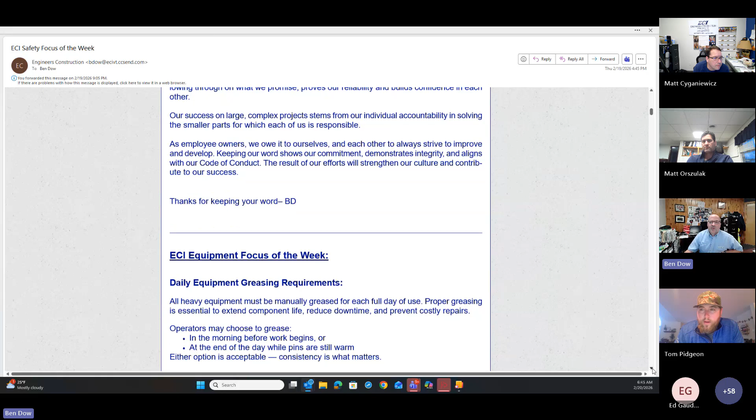This is going to strengthen our culture and contribute to our success as a company. It's going to allow us to do big, complicated projects because we'll be able to trust each other, and it's going to make us happier when we can trust each other. So I'll go back to what I started with: don't be a liar. Don't lie.

Intentionally or unintentionally. So any of the mechanics, Brad or anybody, if you want to chime in on this one.

Equipment focus of the week is greasing the equipment. It's got to be manually greased at least once a day, and proper greasing extends the life of the stuff. It's a way that we can take care of it, make it last a lot longer, and avoid a lot of costly repairs.

So operators, sometimes they grease in the morning. I used to have a guy who always greased in the afternoon, after the pins were warm, because he thought it was easier to grease. So it's up to the operator, but there are some things we need to grease at the end of the day anyway.

As you see in the special notes, if you have a wrist, this guy Del Gilly ran one of the 595 rubber tire excavators, and he'd pump a couple shots of grease in there at coffee break and at lunchtime. He'd hit that wrist - he had a Wainwright twister wrist on that 595. Larry Raymond told me one time, and I think Pat Wells can attest to this, that the machine assigned to Gilly lasted so long and was so tight on that wrist because he greased it like 2-3 times a day.

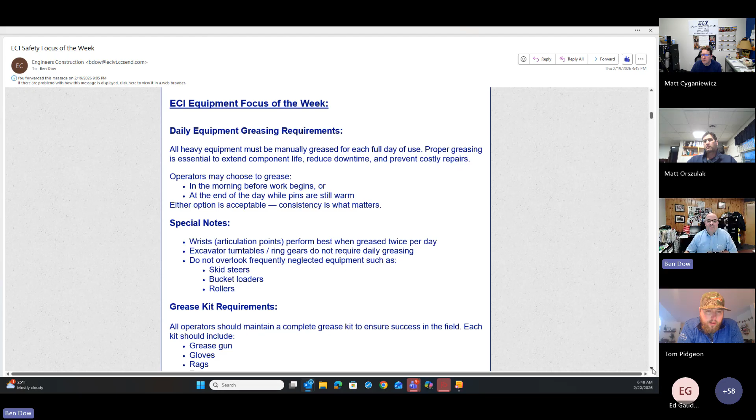Those slip seat items - when we're slip seating in skid steers, loaders, and rollers - sometimes you've got to be the one that says, man, that doesn't look like it has any grease. Let's grease it.

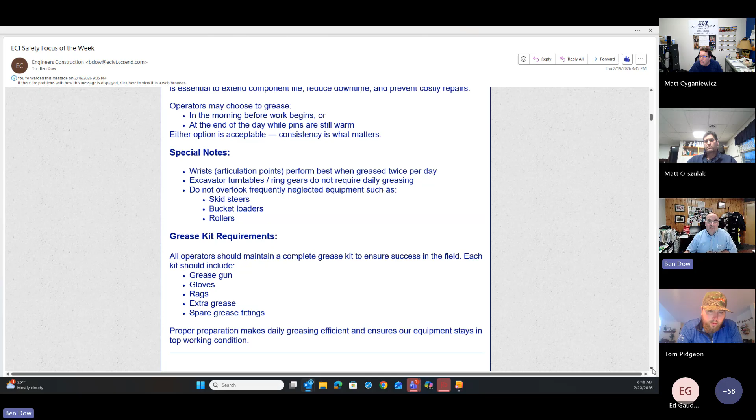I had a good grease kit, and the operators - we should all have some items. We all need a grease gun, of course, and it's good to have gloves, rags, extra grease, but also spare grease fittings. I remember Gilly had a little tackle box we gave him with different fittings and a couple of special sockets to get some of the fittings, because sometimes those things get plugged or damaged and we've got to replace them.

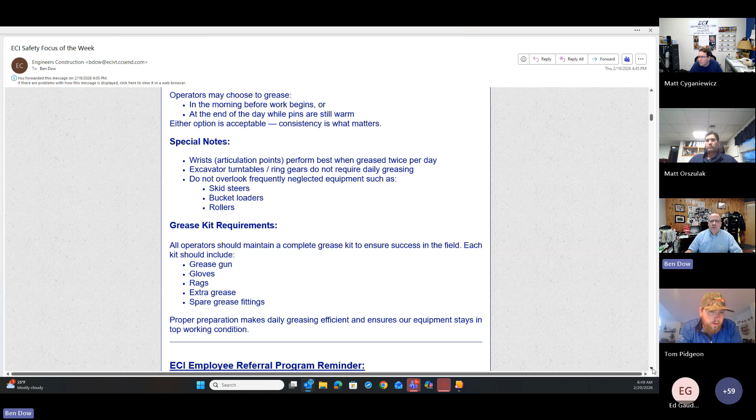We also had - I remember Larry had a thing he'd hit with a hammer that would actually open up a plugged grease fitting, and I'm sure the mechanics know how to do that. So greasing the equipment is really important. Any of you guys out there, mechanics or anyone, have any comments on greasing equipment? I probably can't stress it enough.

I would just say, don't hesitate to call. If you got something that won't take lube, call us. Any questions at all, call. If it's squeaking, squealing, won't take grease, we need to know. We'll help you out. We're here.

Anybody, all of you, call. You guys would rather have a call to help grease than to get called every time something breaks, right? Or show up when there's 2 inches of play in the joint. It hasn't been greased in forever. Let us know.

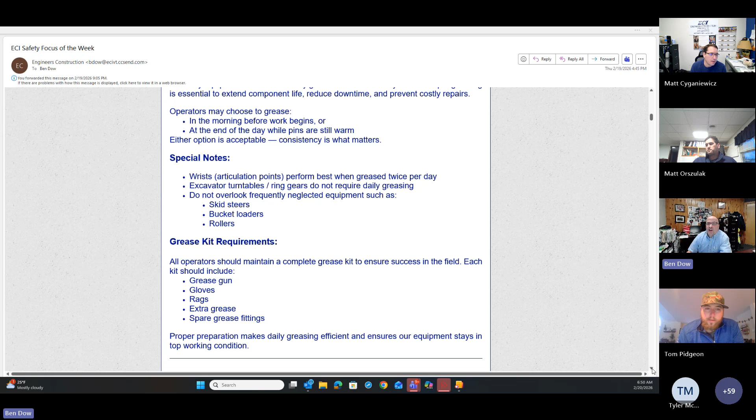And I think it's really important. I can say this stuff, and sometimes we say this stuff, but when one of our guys on the staff says this stuff, they mean it, and they care about our stuff just as much as and more than we do. It's like these are like their kids.

These pieces of equipment, they really care about them. Be sure that you're inspecting everything as you go too, especially our bucket connections. We haven't had a bucket fall off in quite a while, so let's keep that up. Oh yeah, definitely.

Perfect. So take care of our stuff. And remember that whenever you bring something back in the shop, I always say this, clean the crap out of it, because those guys have to clean stuff out of the cabs to get to their work. And it makes them feel a lot better when something comes in and it's at least clean of debris and trash.

All right, I wanted to remind you all, thank you for taking care of our stuff. I wanted to remind everyone of the employee referral program, because some people probably don't remember that we do have this program. I think we get our best employees from our employees, because I think all of you are a good judge, and you're not going to recommend somebody that's not a good fit to ECI. And we've been very successful.

And remember, if someone recruits you, you can read this, but after someone's here for 4 weeks, if you're noted as recruiting someone on their application, after 4 weeks you get $250. And then if they make it 6 months, that's a pretty good chance that we're hopefully doing our job and we're keeping the right people. You're gonna get another $750. So that's $1,000 per recruit.

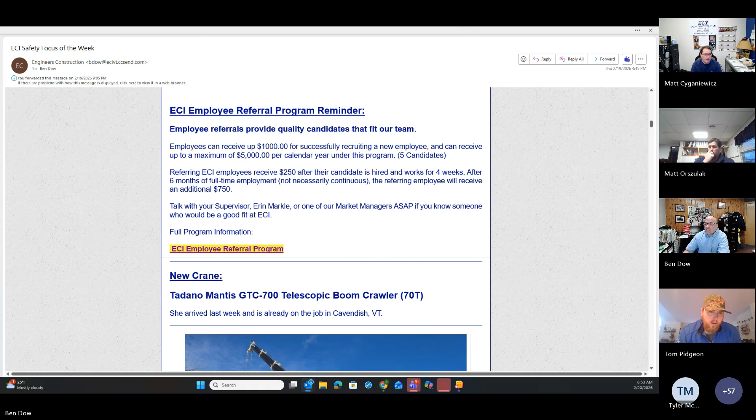So if you click on this, you can see that we do have the complete program listed out. I put that on there so that you guys could all read all the finer details of the referral program. It was revised this January 1st of this year. So it's an ongoing program. And we're paying them out every couple weeks. I sign the little notes that go home to you. So I know that we've got a lot flowing out, which is good. So if you don't know about it, now you do.

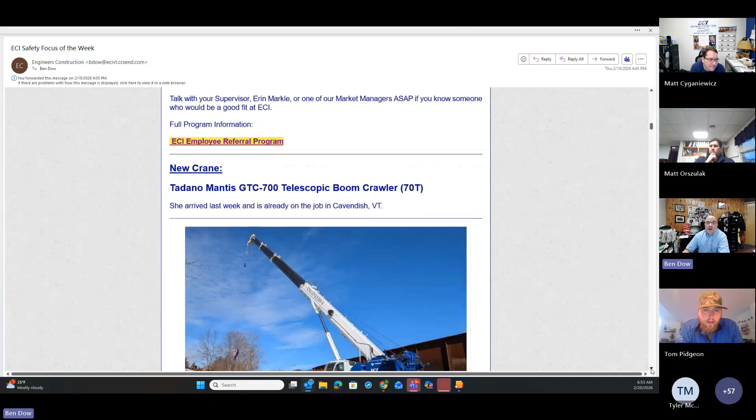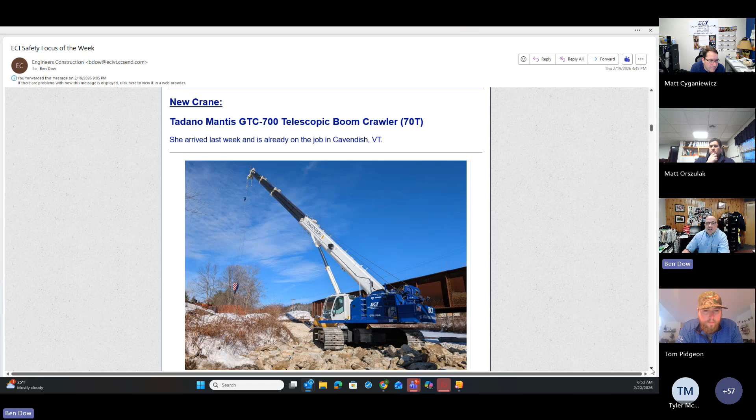We got a new crane. You probably saw it in the yard. The guys got it here last week, and they received training. I noticed that there's not a name on the door. I know we got some guys competing, but we've got a few guys that run it, several guys that run it. But this is a Tadano Mantis GTC 700.

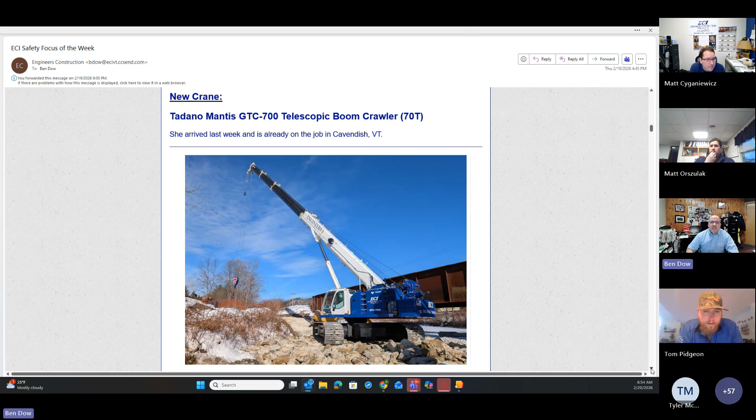It's a telescopic boom crawler, 70 ton. It's got a lot of boom. It can crawl with a load. It's going to replace the 750. The 750's got a lot of hours on it, and you're going to see that cleaned up, and we're going to hopefully get a good price for that to help contribute to this purchase. But I think we should all be proud of this.

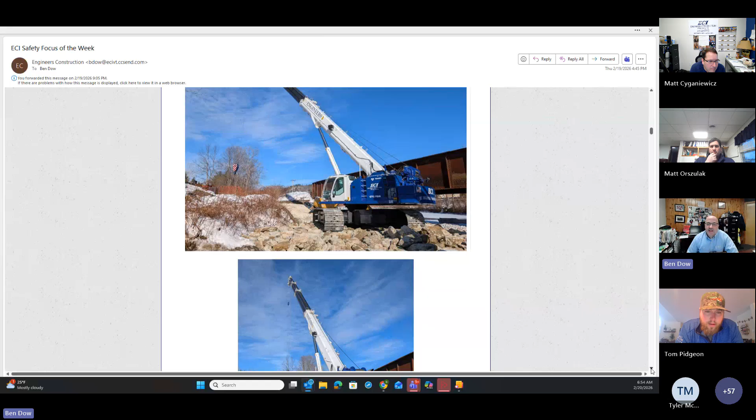I already got an email from one of the guys in Albany that does similar work and gets our newsletter, and he was all excited about our crane last night. But that's down in Cavendish right now.

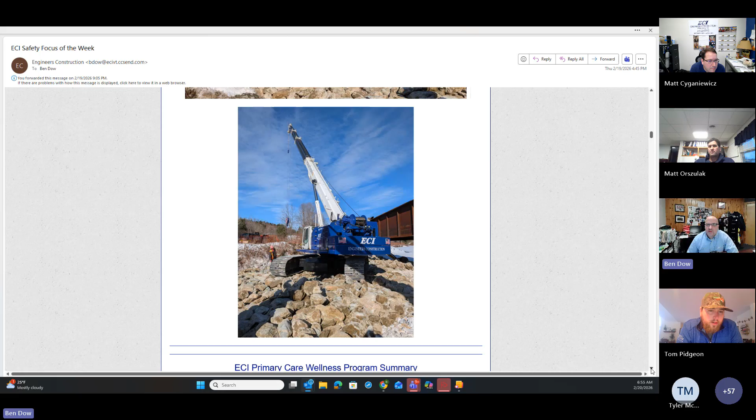She started with basically 0 hours. So we're proud of it, and we're going to continue to feature some of our new stuff, because I think all of you work together and identify these machines and these things that we need to replace, and everyone's gonna see that we're gonna be getting new machines in as we need them in all the groups. So it makes us a little jealous sometimes when we see a new piece and we didn't get it, but rest assured, we're all gonna have that experience.

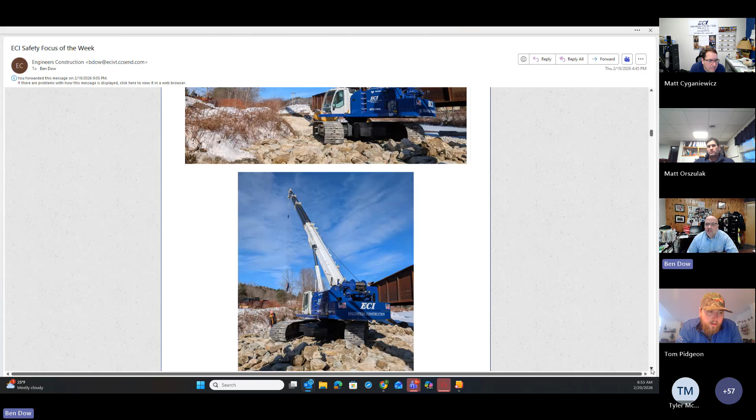And I know there's a lot of new trucks out there, so be happy about those new pickup trucks and things that we've got in the last year. So I'm excited about that crane. I didn't put all the specs in there. I figured you guys can Google it and get all the good info.

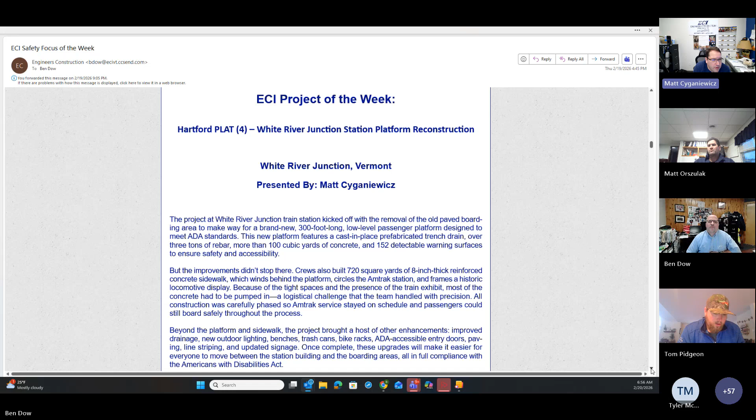The project at White River Junction train station kicked off with the removal of the old paved boarding area to make way for a new 300-foot-long, low-level passenger platform designed to meet ADA standards. The new platform featured cast-in-place prefabricated trench drain, over 3 tons of rebar, more than 100 cubic yards of concrete, and 152 detectable warning surfaces to ensure safety and accessibility.

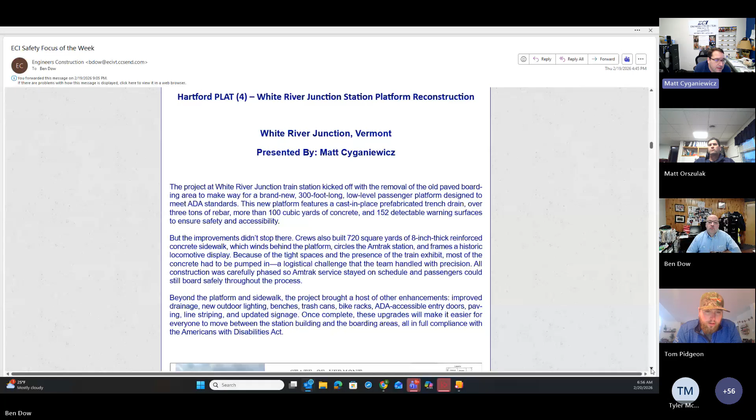But the improvements didn't stop there. Crews also built 720 square yards of 8-inch thick reinforced concrete sidewalk, which winds behind the platform, circles around the Amtrak station, and frames a historical locomotive train display located right near the station itself.

Because of the high, tight spaces and the presence of the train exhibit, most of the concrete had to be pumped in, a logistical challenge that the team handled with precision. All construction was carefully phased so that Amtrak services stayed on schedule and passengers could still board safely throughout the process, which was very important.

We got to do the work, but also keep the passengers boarding and the train moving, no delay to the train. And it was a challenge for all of us to keep everything going.

Beyond the platform and sidewalk, the project brought a host of other enhancements to improve drainage, new outdoor lighting, benches, trash cans, bike racks, ADA accessible doors for the entry to the building, paving, line striping, and upgraded Amtrak signage, which, believe it or not, was a very challenging thing too, because Amtrak has a very particular way they want things done—heights, sizes, lettering, all that good stuff.

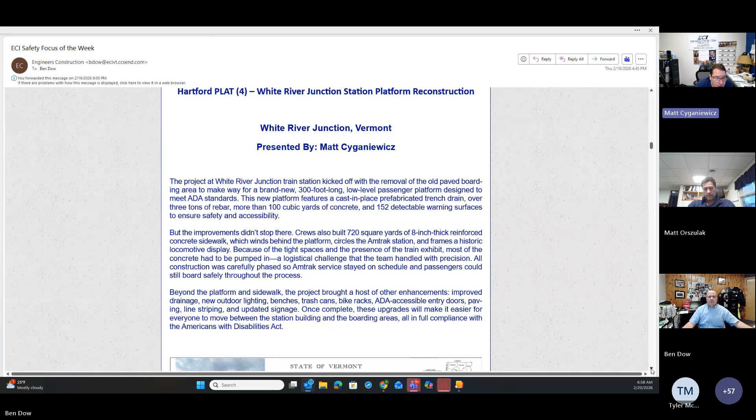Once completed, these upgrades will make it easier for everyone to move between the station building and the boarding areas, all in full compliance with the Americans with Disabilities Act, which was the main focus of the upgrade.

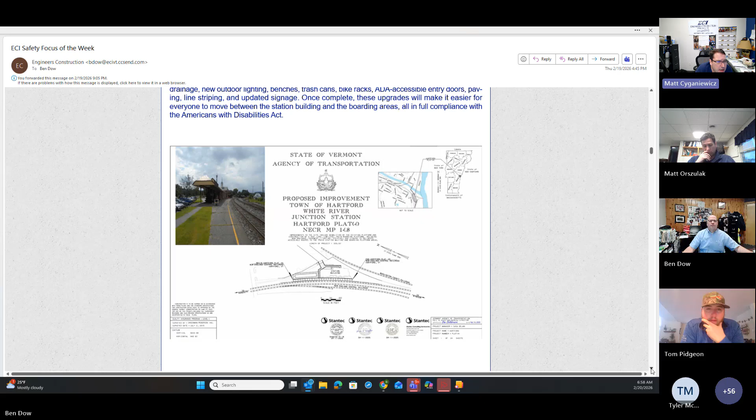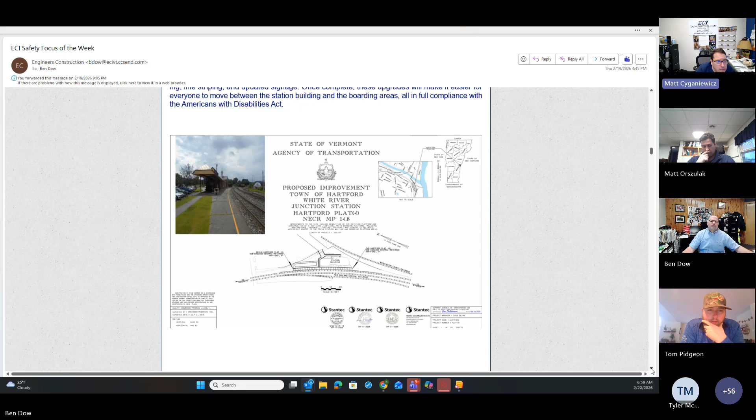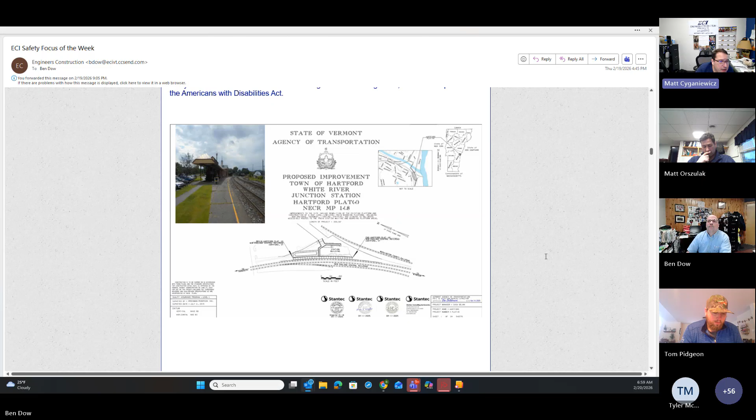Here's the cover sheet of the project. To the left, there's a picture of the actual old pavement platform. You can see the historical display undercover right there. The locals brought that train in and made the platform or the cover over it. We had to protect that during the whole construction process.

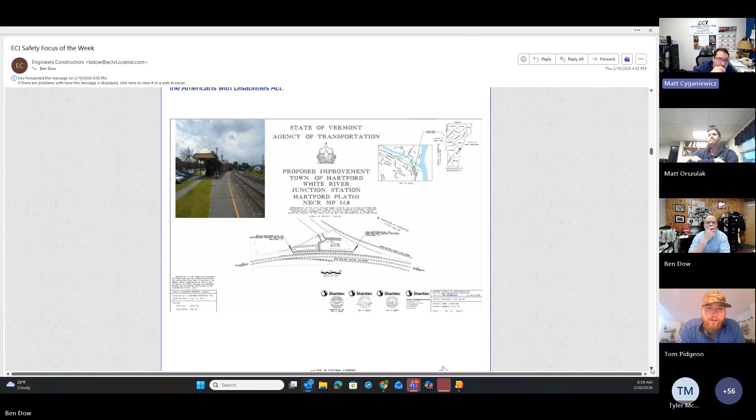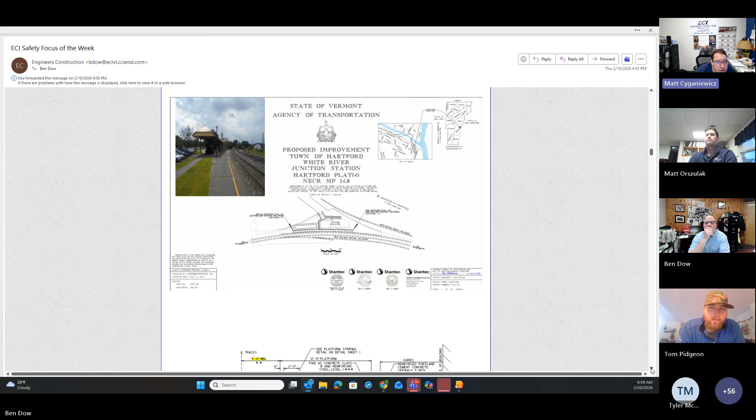And you can also see in the middle picture, the train station's in the middle, and you can see 2 sets of tracks that go to the left and right of the train station. Both of those tracks are owned by 2 different train companies, New England Central Railroad and Vermont Railway. So we actually had to have 2 separate flaggers on the job to control train movements throughout the whole duration of the project.

Go ahead and scroll up a little bit. Just making it a little bigger. Oh yeah, that detail. Yep.

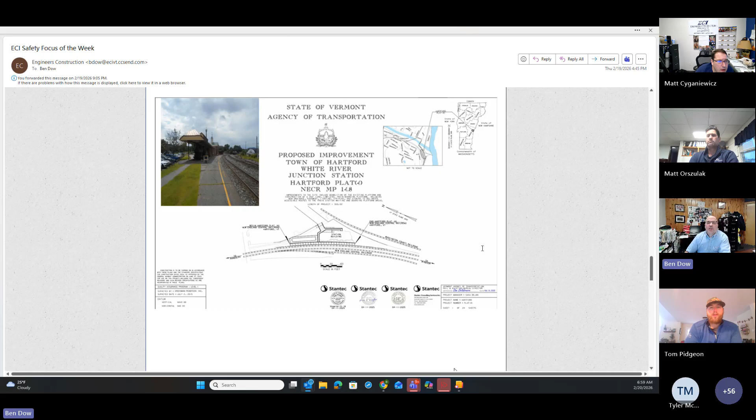Very challenging. You're right in the middle of a bunch of railroad tracks, and we needed a lot of protection.

This platform, typical. Building the platform haunch without interrupting the busy rail line was no small feat. But the concrete team got really creative. They decided to pour a dead man. The dead man's the purple square to the left near the rail. They poured that, and then you could see a green line that connects to the outer form, which holds the form up so we could pour the concrete and keep trains moving.

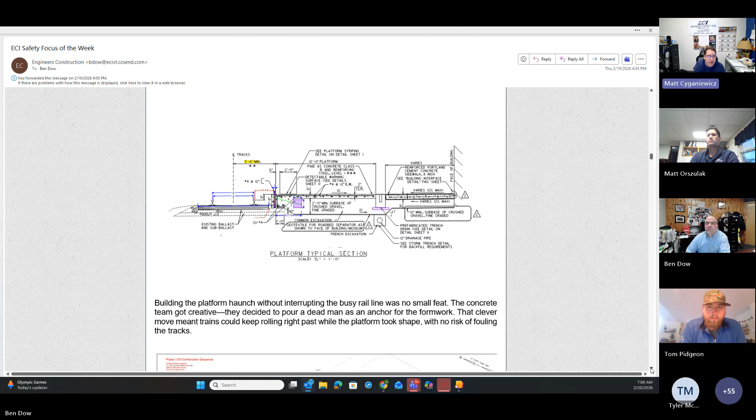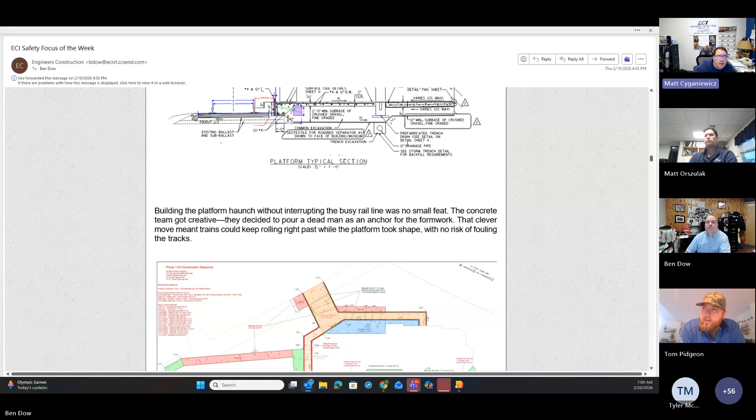The clever move meant trains could keep rolling right past the platform while the work took place, with no risk of fouling the tracks. You could also see the little mud mat they poured under the trench drain, typical to the right, to keep the trench drain at a perfect grade and something nice and strong to build it on.

This sheet is the platform. So the platform's in the front, all reinforced with rebar in that thickened slab, and behind it are the sidewalk areas. To the left would be where the train display is. The white in the middle is obviously the Amtrak station, and then the sidewalk that goes around it.

And on the edges, they had some nice exposed aggregate. You'll see in pictures later.

The crazy part about this was coordinating concrete and lining up the pump was very challenging. Chandler and Cody Marsh worked daily calls, shuffling schedules to line up both items at the same time. Carroll is a very busy company, and you really have to schedule ahead of time.

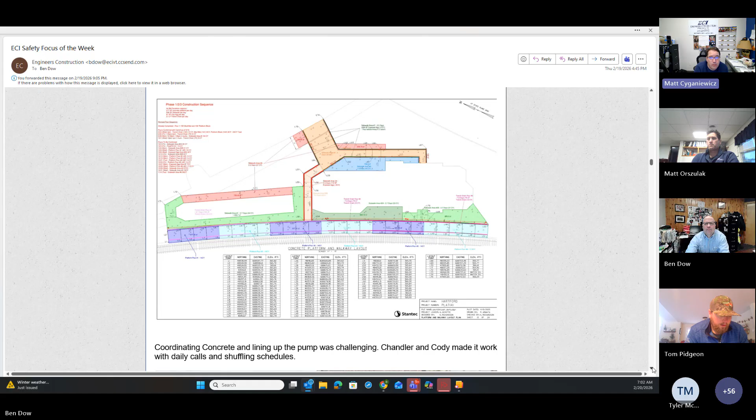Cody came up with this pour schedule with multiple pours. Most of it all had to be done with a pump truck, which you'll see in pictures coming up. Very challenging. You think it's just pouring concrete, but scheduling the trucks and the pumper at the same time is crazy.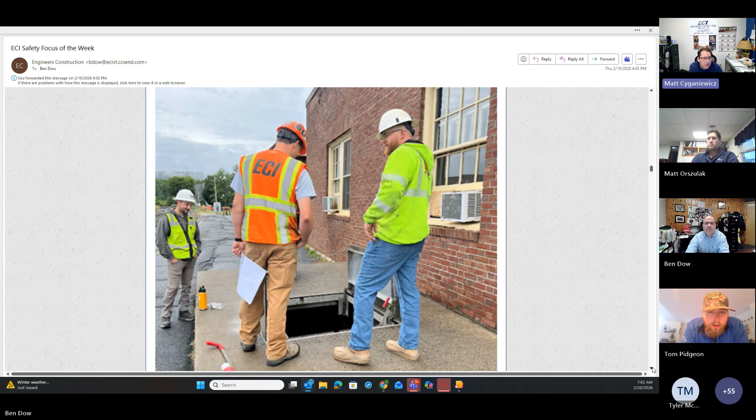So this little opening here leads down to a very interesting tunnel. Part of the contract was to close off this tunnel. The contract called for ECI to demo and seal up a piece of local history, an old underground tunnel that once stretched from this train station all the way across the tracks to the local post office.

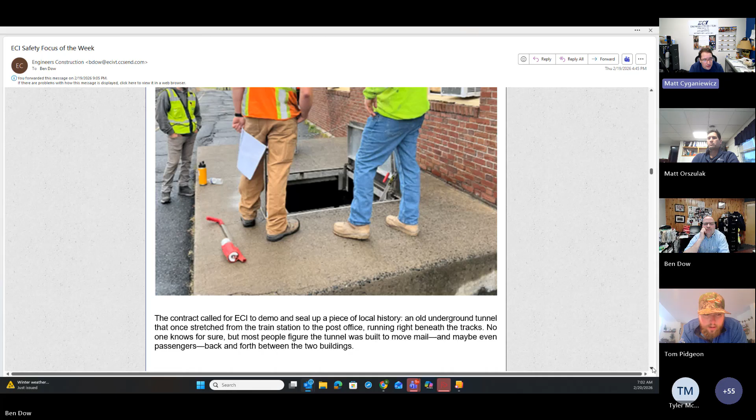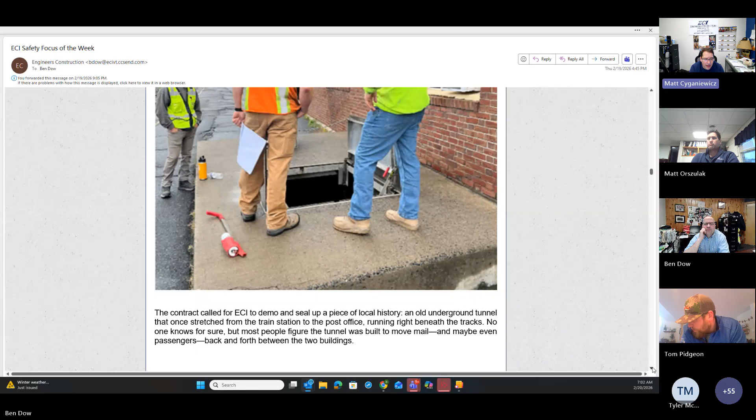No one really knows for sure, we've looked into this and done some research. There's a lot of speculation, but no facts of what it was actually used for. But most people figure the tunnel was built to move mail and even passengers back and forth. Some articles I read said that because the tracks are on both sides of the Amtrak station, they didn't want people walking over and tripping on the tracks. And the mail was huge down there with train delivery, so it was an easy way to get mail back and forth from the post office.

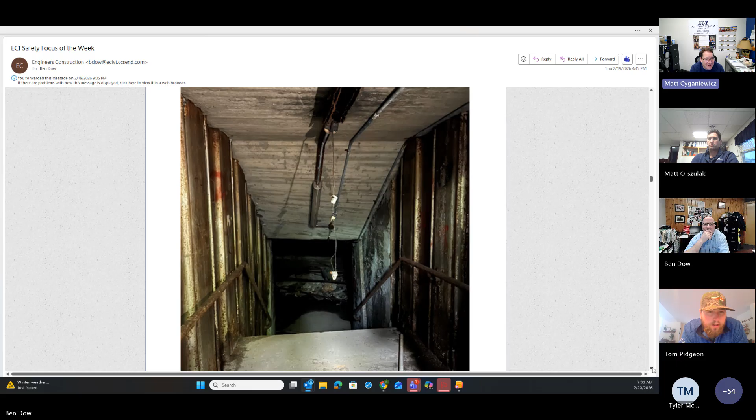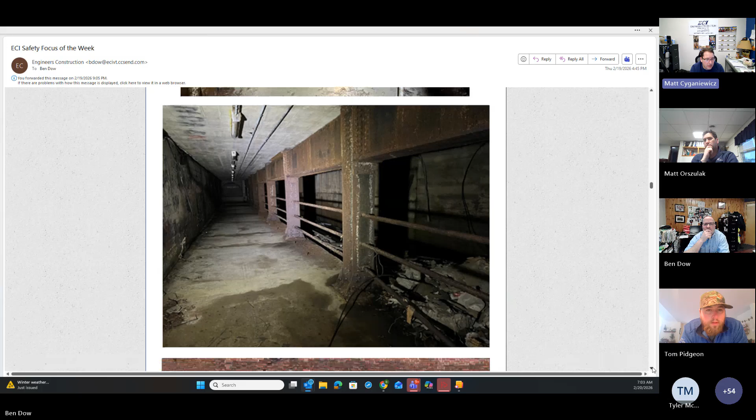This is looking down into the tunnel from the stairway, which needs to be shut off. Very interesting, this goes right under the tracks, way to the post office. You can see to the right there's some type of area down there; we're guessing that's where they slid the mail back and forth. And the left here was the passenger area, or staff area, to get from point A to point B. Very cool, very interesting, and a little spooky down there.

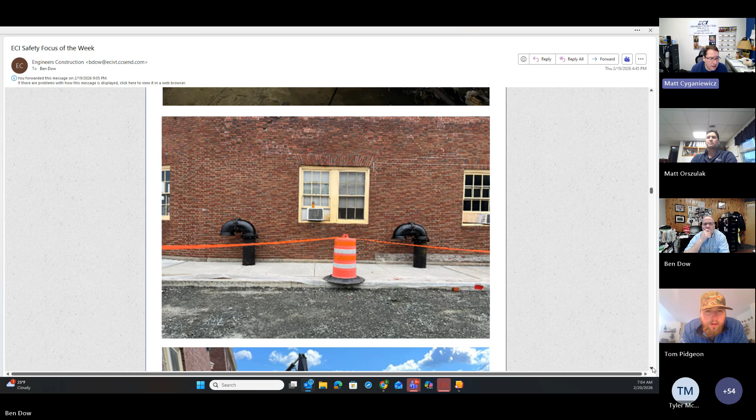I threw this picture in there. They did want the enclosed shaft vented, so we came up with this idea to use water pipe to vent it. Chandler and the crew and everybody there did an amazing job, and it came out very well.

And this, you can see the crews. It looks like they used sheet piles to kind of form the stairway down. We had to remove all that stuff and get it out of there. Then we poured just a cement concrete wall to enclose the tunnel. We didn't collapse it or fill it in; it's basically just a blocker there so we could build the platform and sidewalk without having that underneath.

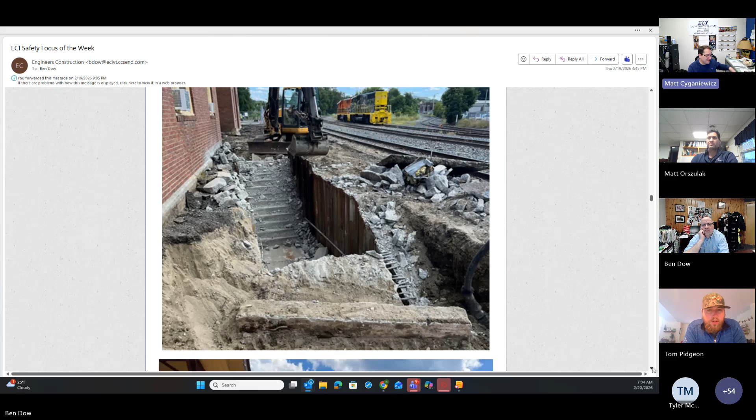There is still a way to get in there. There's like a little manhole cover to the left, so people could still get down there for some reason. I have no idea why. I wouldn't go down there at all. It's spooky.

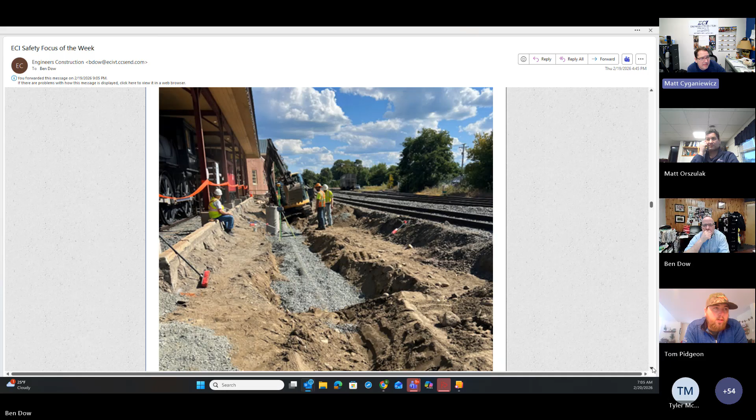Here's the guy starting to work from the ground up. You can see the drain—this is for the prefabricated trench drain that will collect the water. There are some new lights that went up in front of the Amtrak station. You can see they have a base set there, and they're just getting in the under drain and working their way up.

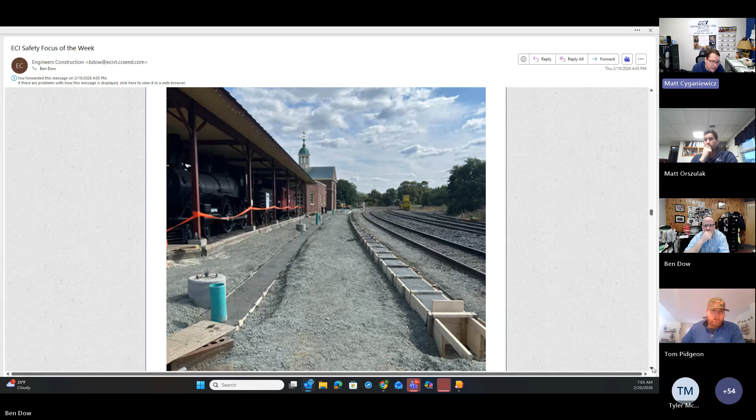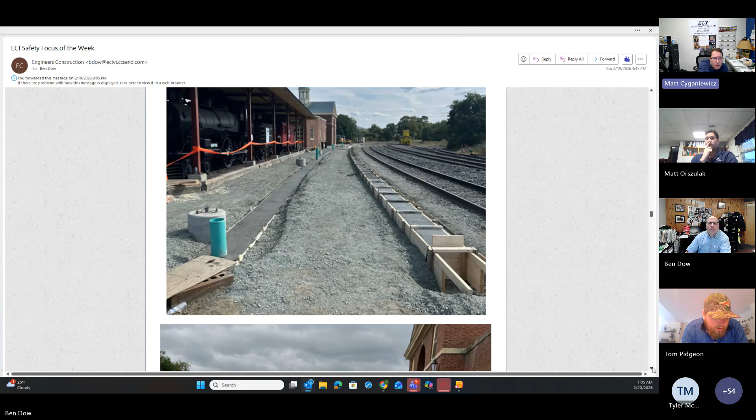You can see the historic train display to the left. These guys protected this thing with their lives—here it's just LOD, but sometimes they had to put up plastic so nothing got splattered on it. The crews really worked hard on this. You can see to the right the dead men formed up, and to the left is the mud slab, or leveling slab, for the trench drain.

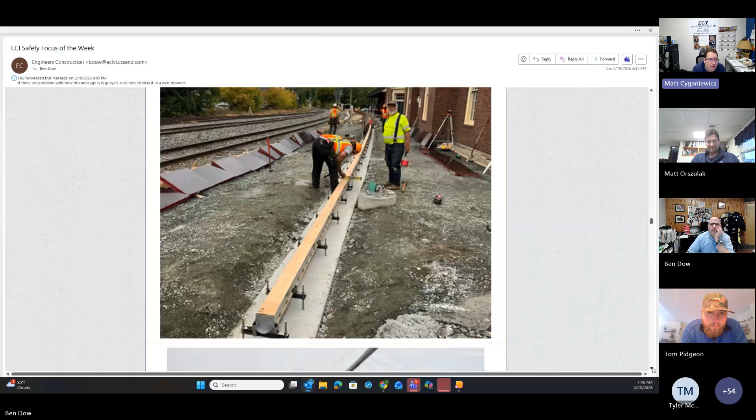The concrete guys came up with all this stuff, and it worked out really, really well. This is the prefabricated trench drain. On top is a piece of plywood so that when we do the closure pour, no concrete gets into the drain. They're leveling it, putting the pitch on it. Just a lot of work—it's 300 feet of platform.

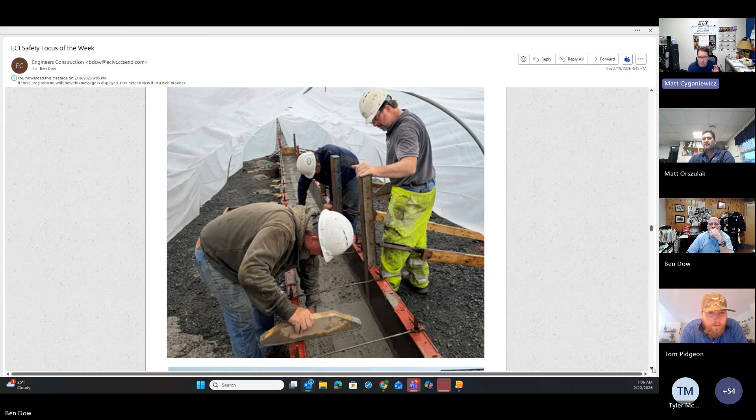I was down here on this day. This was the closure pour for the platform. I've always heard the concrete guys talk about using conduit to make a tent, and oh my God, it worked out great. We were able to pour 300 feet of this drain closure during a very high rain event, and it didn't slow us down. Not a lot of money in plastic or conduit—the guys did an amazing job.

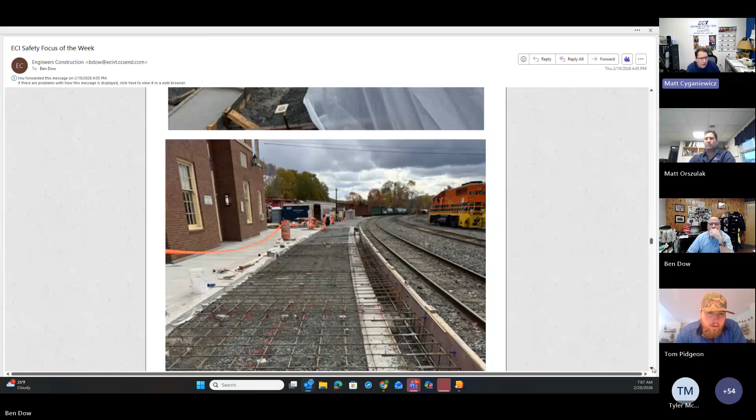This is a great picture that shows the dead men to the right, and you can see some tie bars holding the forms to the edge of the railroad ties and ballast there. We needed to protect that edge—we couldn't have it exposed for trains to push the track back and forth. We needed to maintain that ballast. You can see the rebar mats. A lot of work there.

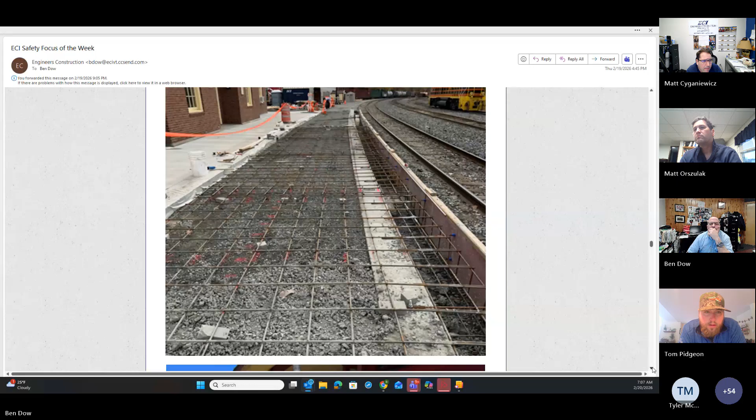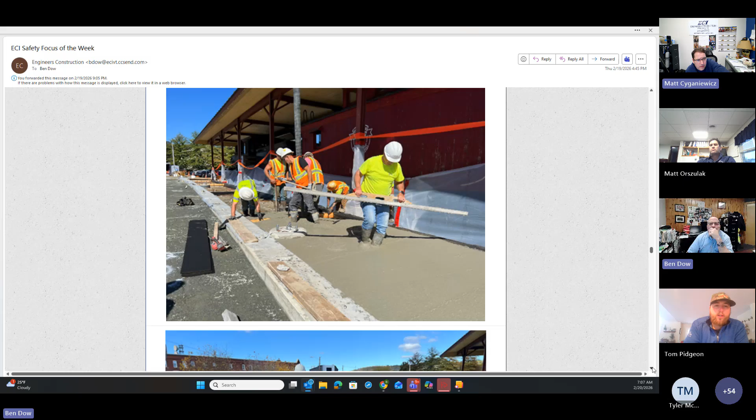Here are the guys doing the reinforced sidewalk pour. The platform would be to the left, not poured yet. The guys are doing the 8-inch reinforced concrete pour right there in front, and you can see where they taped the plastic up to protect the train display. Everybody took really good care and worked really well together.

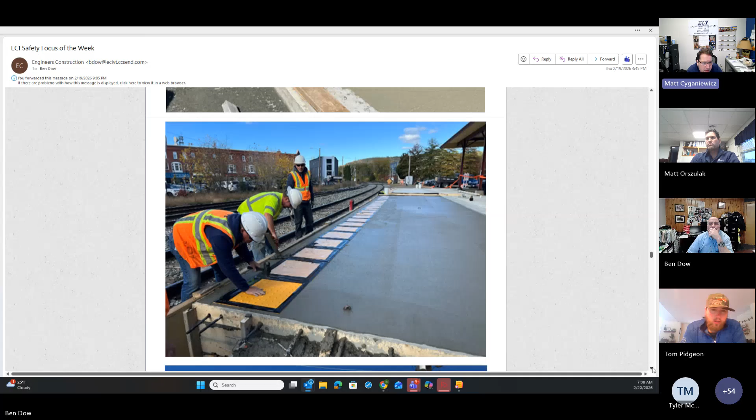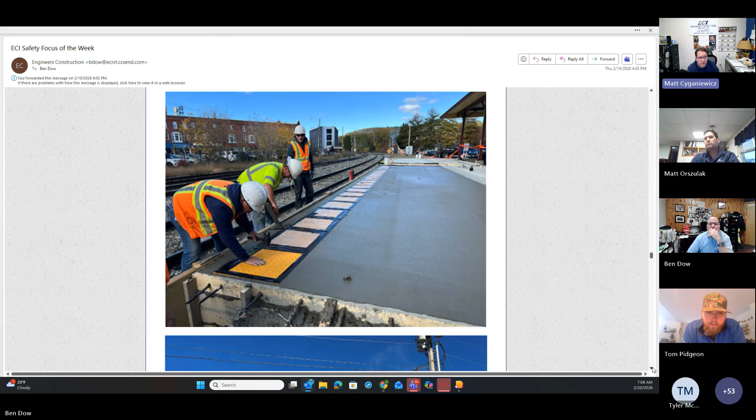Amazing team down there. Here is Ronnie and the crew setting detectable warning surfaces. If you remember that sheet with the multiple pour schedule, this is just one of the sections we poured, and Ronnie was down there. Ronnie went down daily for these pours, just making sure everything went really well.

There's Troy. And oh, this is a great picture—we literally had to use this pump system from this side all the way to the other side. It was the only way to get the concrete to the platform and around the building. It went up and over the building, which required care not to damage the historic Amtrak station.

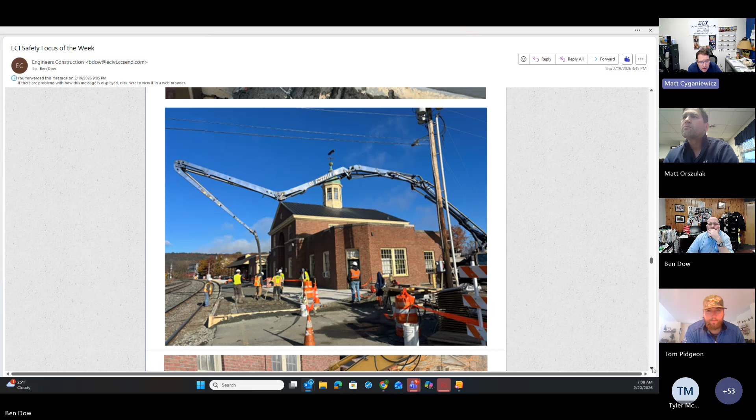Very cool stuff. This is around the front of the building. That's Ronnie stretching out there, using the bucket to finish the edging, and the guys helping. You can see the reinforcing wire in there and the sections—how we had to pour it just to make it work.

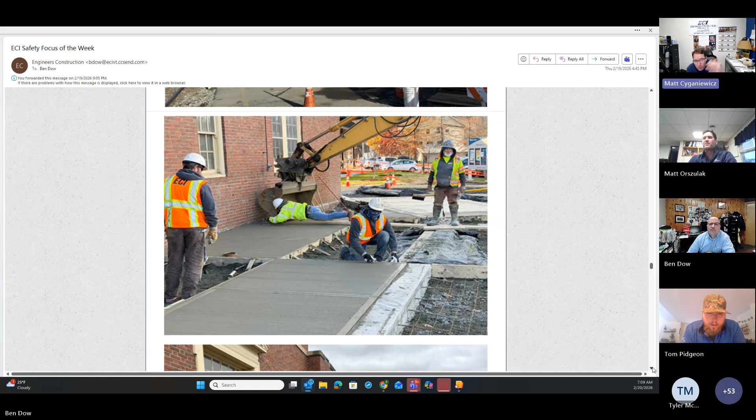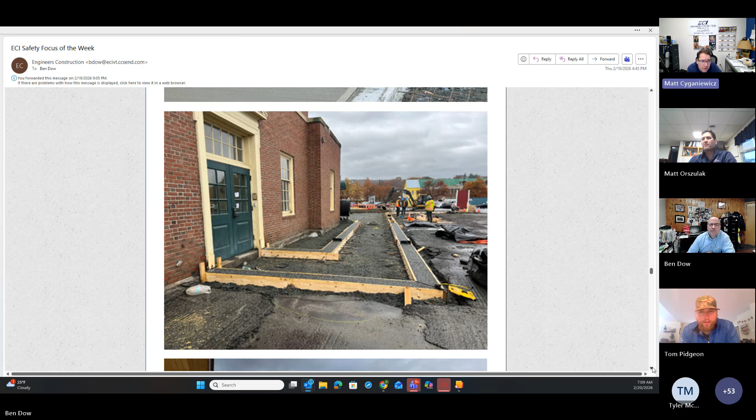Pretty cool—this is a good picture from Katie. It shows before we poured the middle part of the reinforced sidewalk; they had some nice exposed aggregate, and it came out really well. It looks really nice and added a nice little detail to the front of the entrance.

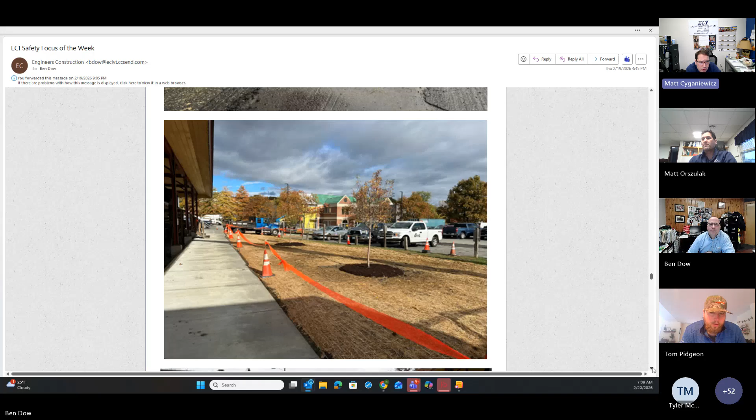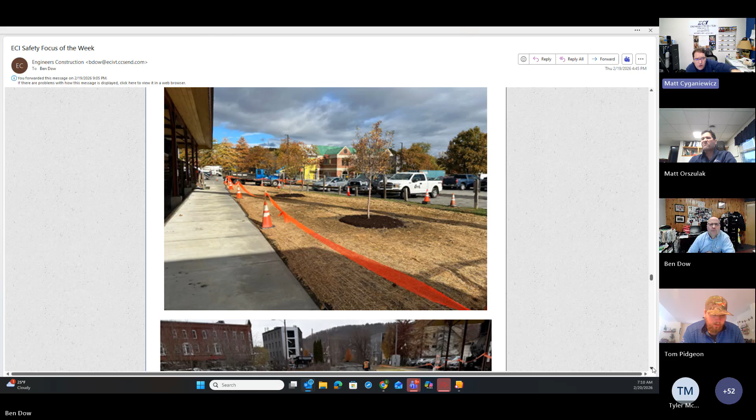There was some landscaping, a small amount of new trees and landscaping on the job. This is a finished product—to the left is freshly poured reinforced sidewalk that wrapped around that train display.

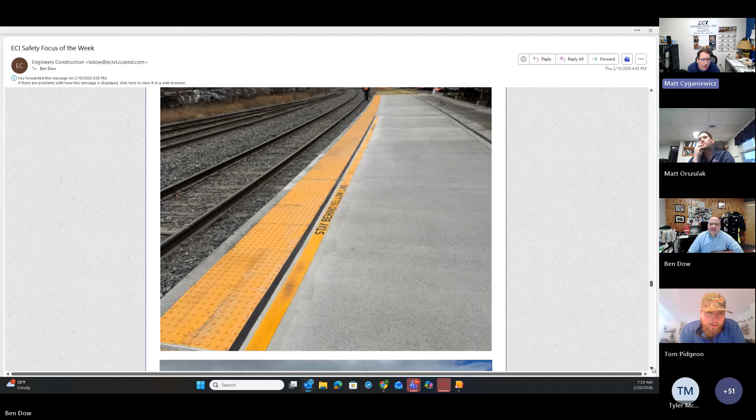This is after the platform was poured with the detectable warning surfaces set in there. In came L&D with this very expensive yellow line that they actually heated up and melted into the concrete. Very interesting, but it looked good when it was all done.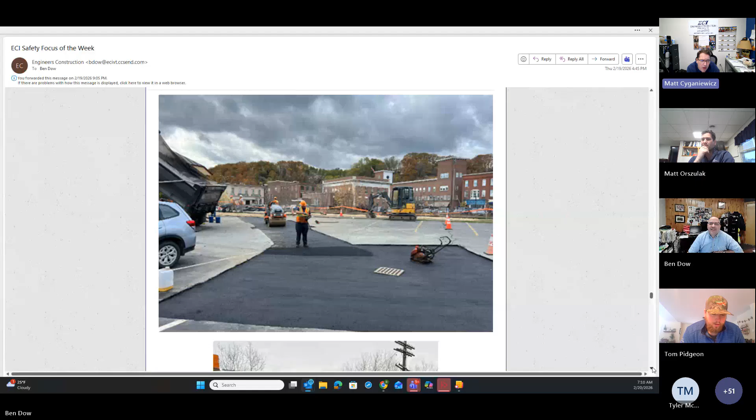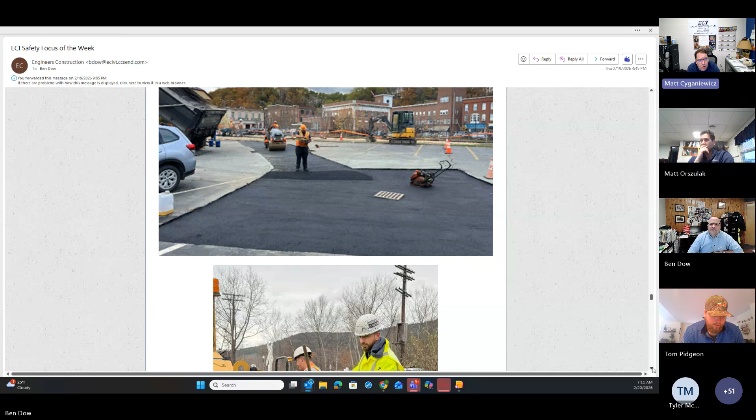Of course, on most jobs here we have milling and paving. We did have some patchwork on this job. There was a sewer tie-in that turned out to be all plugged up. It was a big change order. Cody Marsh worked very hard on the logistics of it, and it went right across the parking lot. So there was a huge change to the original septic scope, but the guys pulled it off, and here they are patching it back in.

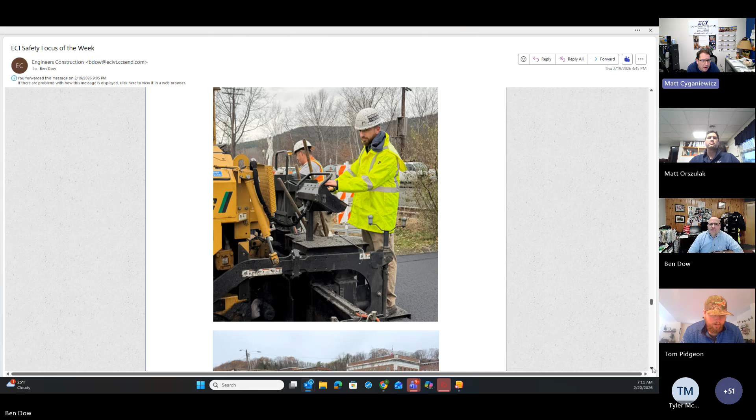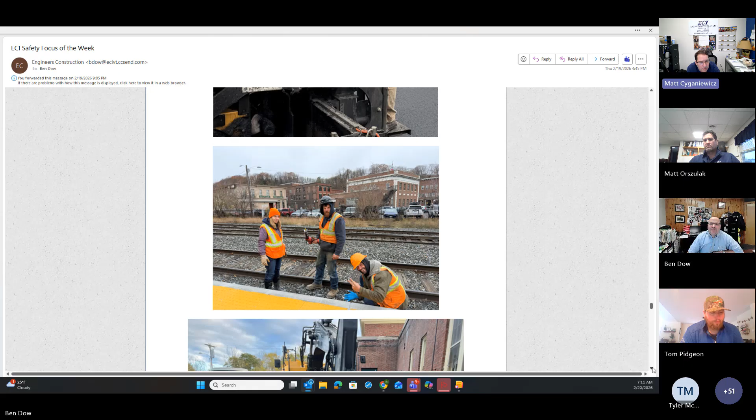The pavers doing their thing, making it look good. This was a monotonous job - all the joints needed to be sealed. I think we used a Sikaflex product, and it was just very monotonous, a lot of it. And these guys, look at them, they're happy go lucky, let's get the job done.

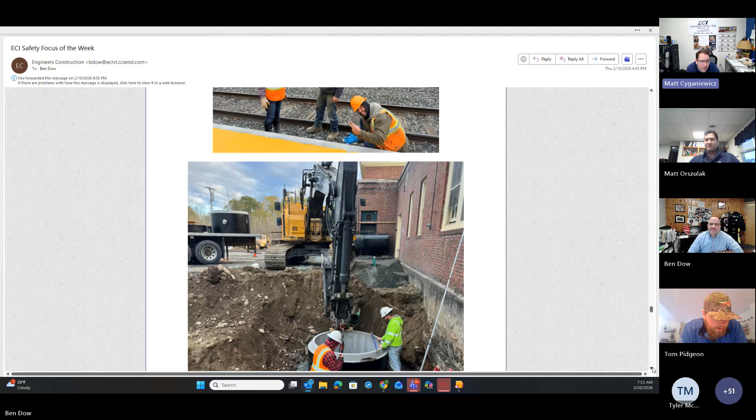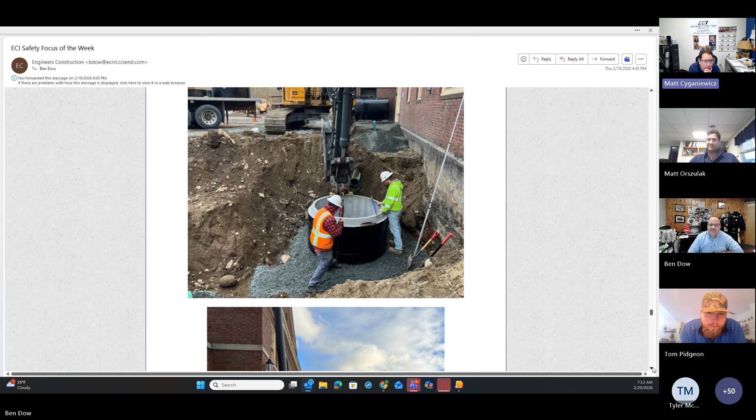The crews down here were amazing, just right at it. This was the original part of the contract, to set a new structure to tie in the existing sewer. But when we did this, we found out it was compromised, broke, and plugged, and we had to make it right. So we worked with VTrans with a change order to make it right. These guys again did an amazing job - this isn't their cup of tea, and they pulled it off very well.

Here is the electrical crew doing the finished product with the lights and stuff. You can see a couple other light poles down there. There were some building mounted lights as well. Gave a nice upgrade to the lighting of the platform.

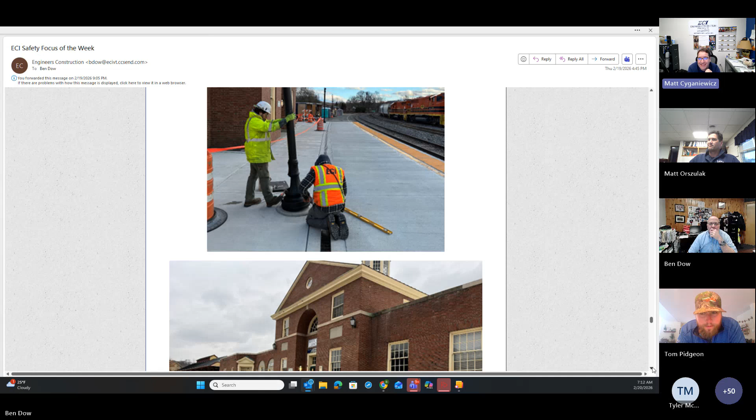And this train station - when I went down there, I was thinking oh, 2-3 guys are going to get on this a day. This is a busy train station, and anybody on the job can attest to that. A lot of people, I don't know, 15, 20, maybe I'm going overboard, but would board here daily. We had to make sure they had nice, safe access to that area.

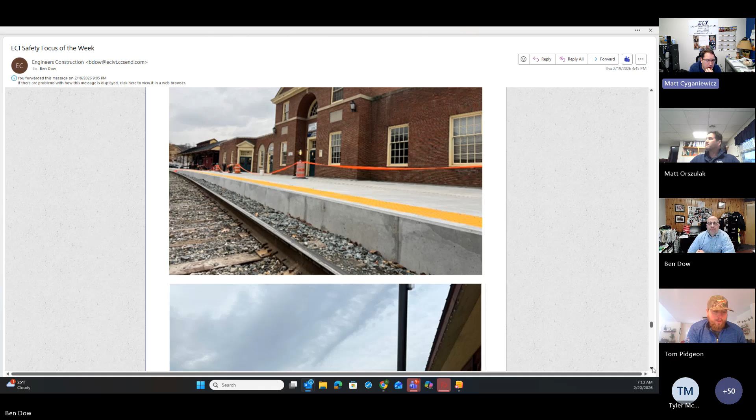Here's the finished product, this picture was taken by Katie. Amazing work, guys, amazing teamwork. And here it is, great picture with the light poles. You can see the drain. Looks good, and Amtrak ready to pull up. This platform really helped because the other one wasn't at the right height for people to get on, so they were taking higher steps. This is to ADA standards - the whole platform, everything is to ADA standards.

Nice, Matt, thanks for putting this together. That's one of those jobs that we don't see because a lot of us don't get down there. I got down only once or twice to that project. Yeah, great teamwork, great working together. Really appreciate you putting that together.

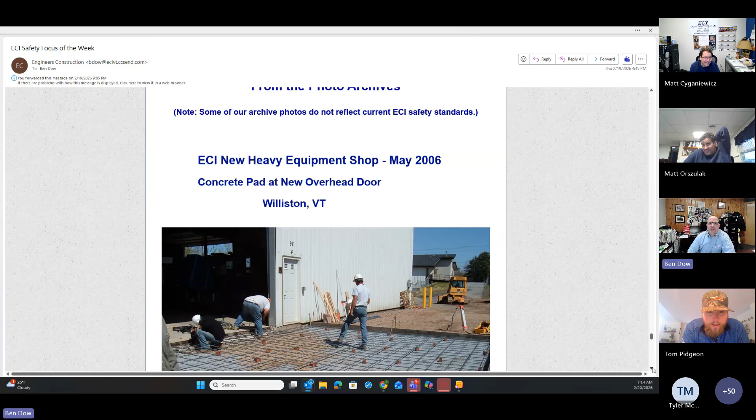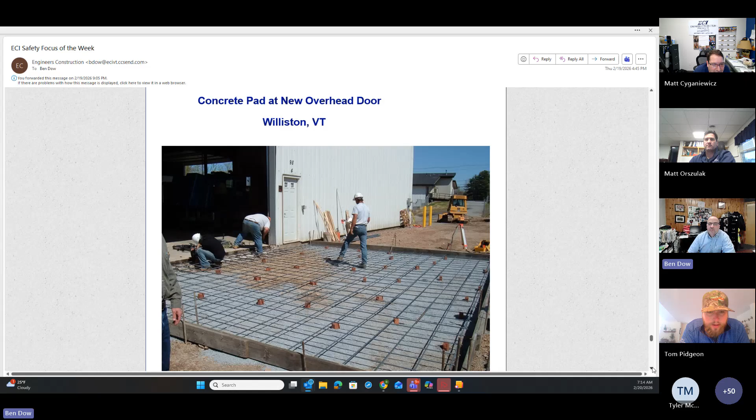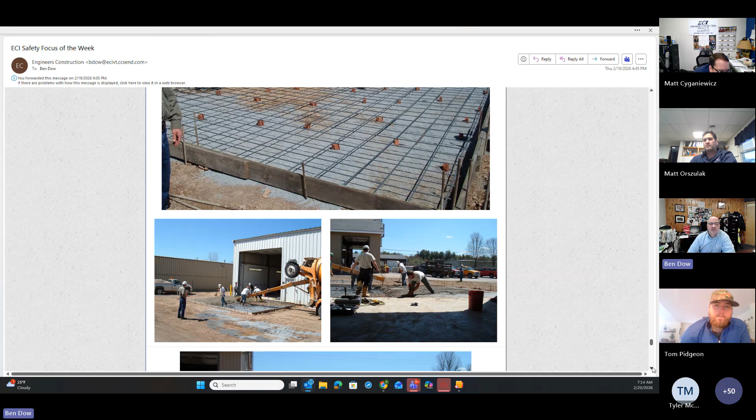Good job, everybody. I found this when we first purchased the building where the heavy equipment is. We tore the fence down because there used to be a fence that ran right through there, and we put an overhead door in. This is the guys back in 2006 pouring the pad right out between Chico's shop and the heavy equipment shop. That's Paul Brown and John Zeno and the guys. There's no pavement out there yet because that was before we paved it. But I thought those would be kind of cool - I found those, and look at the old pickups, the 90s pickups over there.

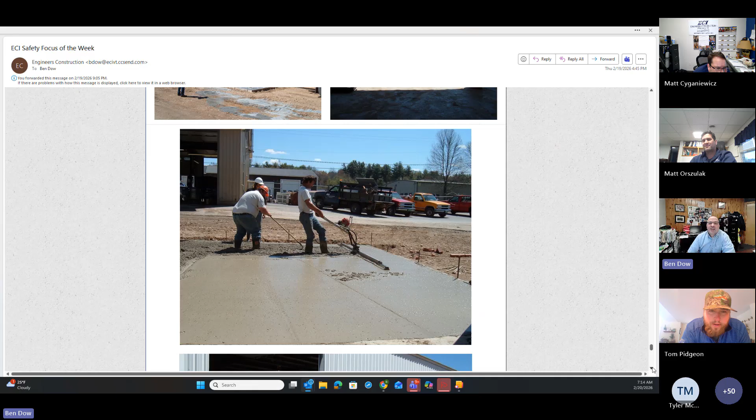Who is that, is that Harley? No, that's Paul. Oh yeah, with his hat off. Yep, good old Zeno. Griswold Concrete, STG. Yep, so that's a little history right there.